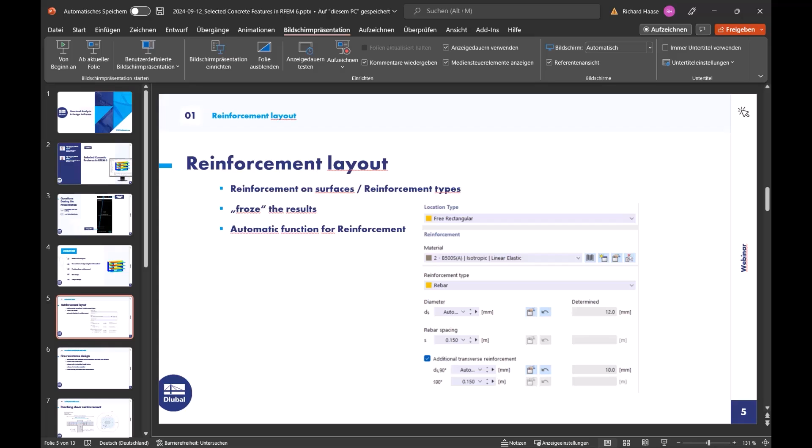Okay, then now let's really switch to RFEM 6. It's a two-story building, a simple building with some cantilevers. The materials are also normal, so normal concrete and concrete steel, nothing new and spectacular.

Important for this webinar is that you have activated the concrete design in the base data add-ons. All these features I will show you need this design add-on activated.

And for the fire resistance, it's an additional point, but I will show you there is a connection to the building model add-on, because in the building model add-on it is possible to define shear walls and deep beams in a simplified way. If you don't use the building model, you must create, for example, the shear walls and deep beams via result beams. The building model has a lot of other features, but I will show you this fact for the fire resistance.

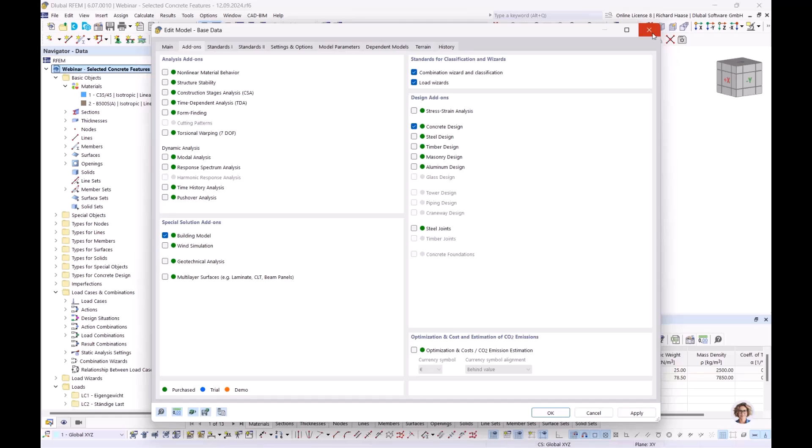But then let's come to the reinforcement layout.

I go to concrete design. We start at the beginning with the ULS, and don't calculate the SLS design situations. I want to reduce some calculation time, working only with surface 18, that's here on the top, and want to calculate.

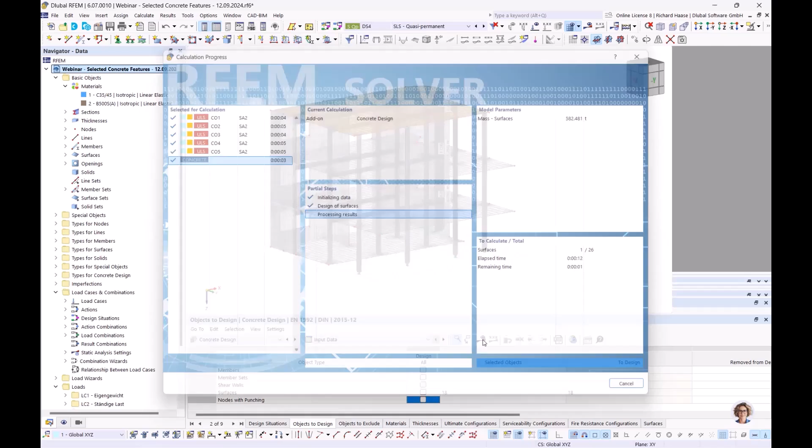So I have designed before some concrete stuff. For example, I modeled the concrete cover, and here's the surface reinforcement.

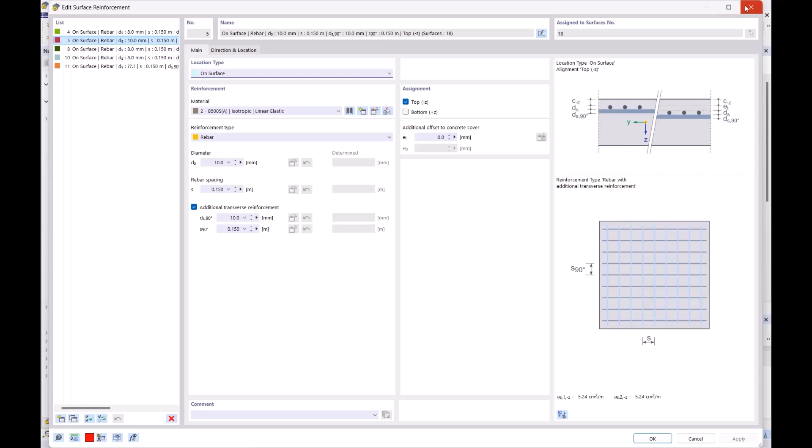So I'll show you for surface 18. I define a bottom reinforcement with diameter 8, rebar spacing 15 centimeters, and on the top 10 at 15, with all location types on surface. So we have here what I mentioned before, this free reinforcement type. So when you choose on surface, it is really on the whole surface.

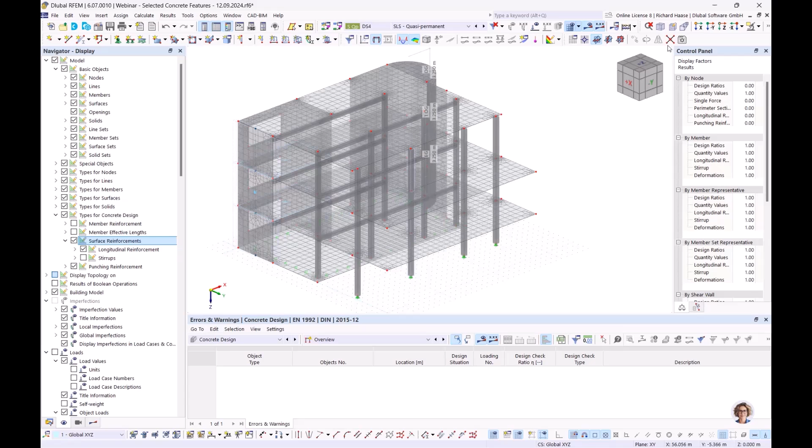Maybe I can show you here on the types for concrete design - the moment. Why don't I see it? Moment. I don't understand - on surface.

Okay, here. So for example, here when we choose surface 18, we want to calculate and select this. Then you see the reinforcement is over the whole surface, and on the bottom side here we have our 3.35, and the top side our 5.24.

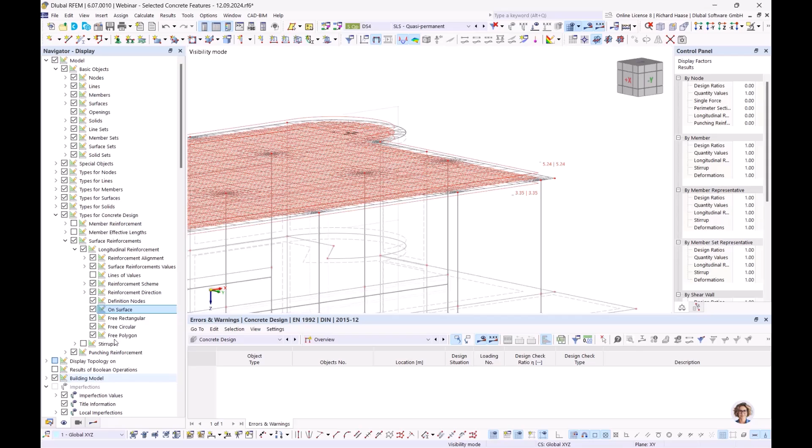So I will deactivate it again, only to show you how you can control it. And then we go to the results, and I want to look at the reinforcement first.

So we have here 3 chapters: required reinforcement, provided, and not covered reinforcement. Provided is what I showed you before. And what's interesting here is the required.

So you see, okay, how much reinforcement we need, also on the top side, and here the bottom side. So, and theoretically you can control it with the provided reinforcement and see, okay, on which points I need more reinforcement.

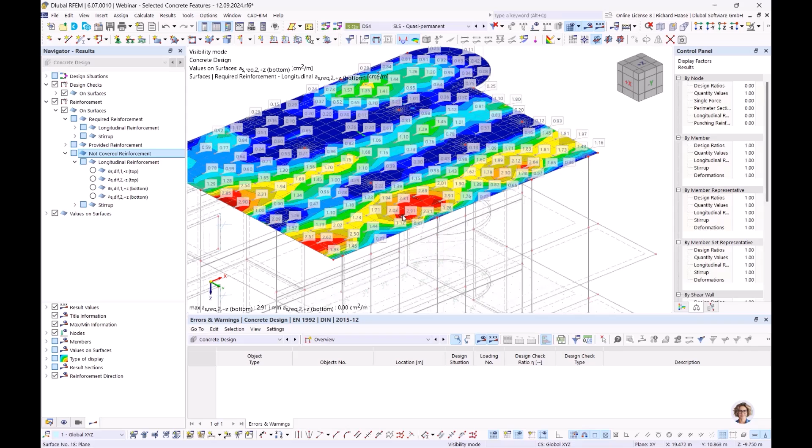So, and to do this automatically, in an easy way, we have here the not covered reinforcement. So you see directly on which points you need more reinforcement. For example, here it's only over the columns a little bit.

Now we have the option - now we know where we must increase our reinforcement. And because it is such a little area, it would not be effective to increase our on-surface reinforcement. So now we want to use our free reinforcement types.

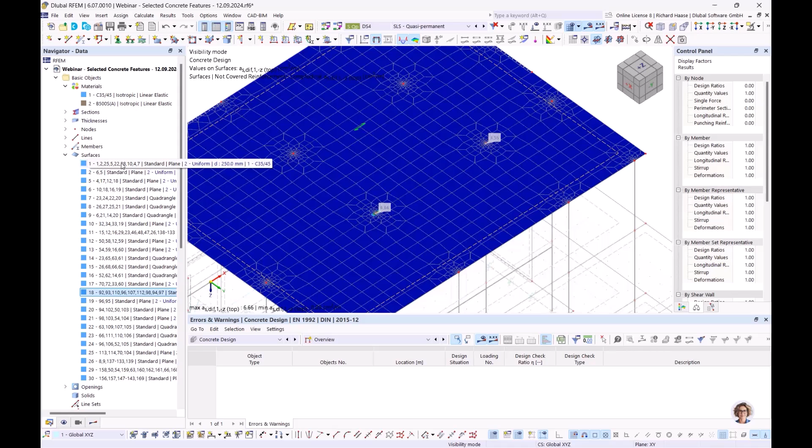So normally, I'll show you for concrete - when I use the surface reinforcements and say free rectangular, then we can choose our new automatic function. And now you can say the parameters, for example from 10 to 20 millimeter diameter, and then it interpolates between these sizes.

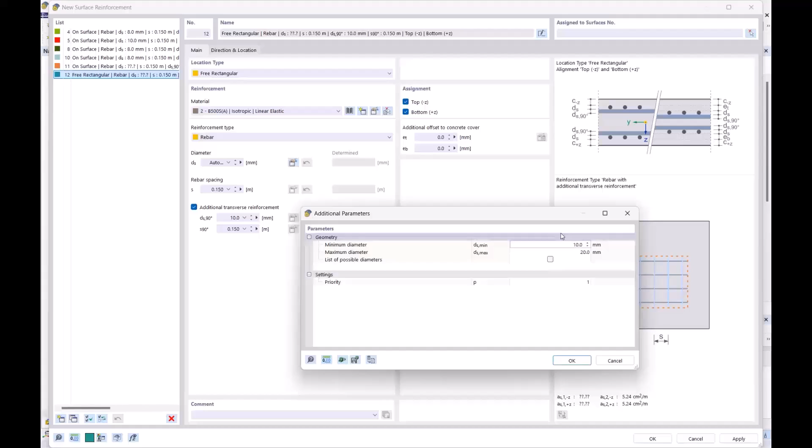What the program or the surface needs for reinforcement. So we say automatic, the same for the additional transverse reinforcement direction. Okay, and now we need the direction and location, say only on top side, and say 1 meter by 1 meter, and set this point here over this column.

Okay, and when I say okay - oh sorry, I don't assign a surface, so we need this 18. And when I click OK now, this question comes up because we define a new reinforcement, so the program deletes all concrete design results. That's the default setting.

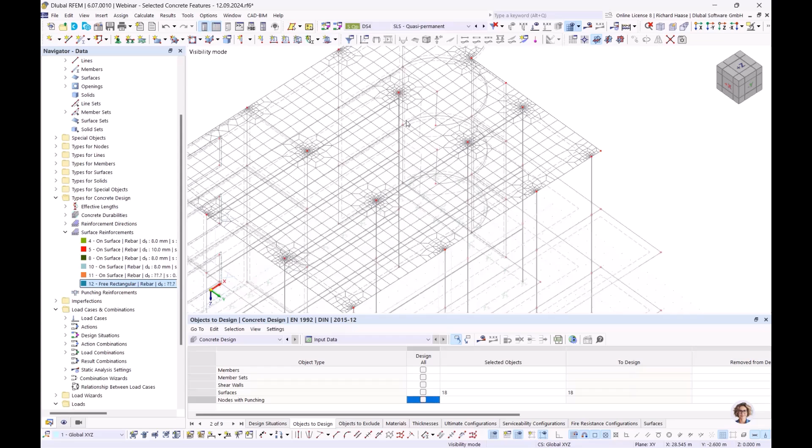Now we can remember that over this column we need additional reinforcement, but imagine you have a bigger model with reinforcement needed at different points - then you can't remember so many areas. So we've implemented a new feature. Let me delete the free rectangular again and show you, in the input data under this button, the global settings for the concrete design.

And now you see a life cycle of results, and this is exactly the point I mentioned. If we deactivate this, then the results are not deleted, and it's a big point for modeling the reinforcement. I will show you.

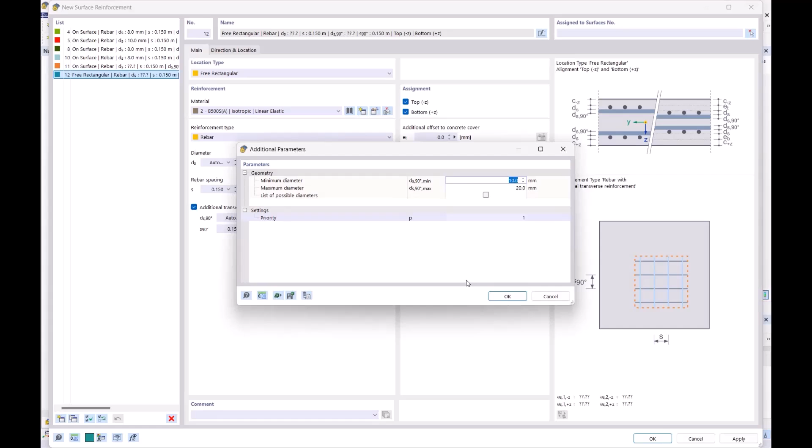So okay, let's do it again. So we say free rectangular, our automatic function, okay, direction 1 meter by 1 meter, and say now okay over this column. So and now we have defined...

Now we have defined our free rectangular reinforcement, and you see the results of the reinforcement are still live. So that's an important point.

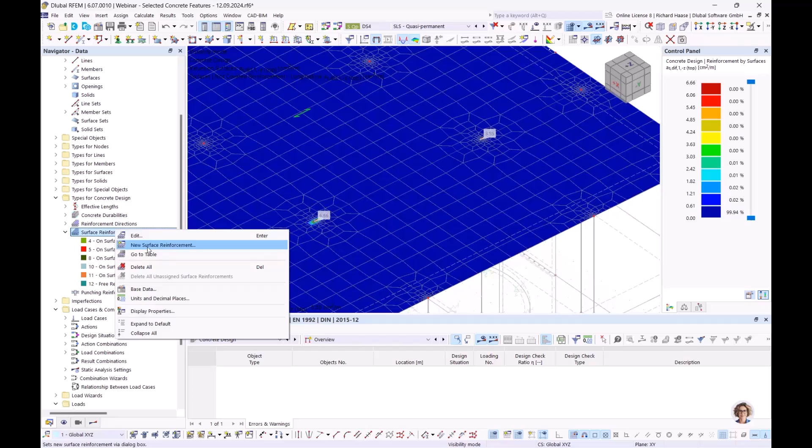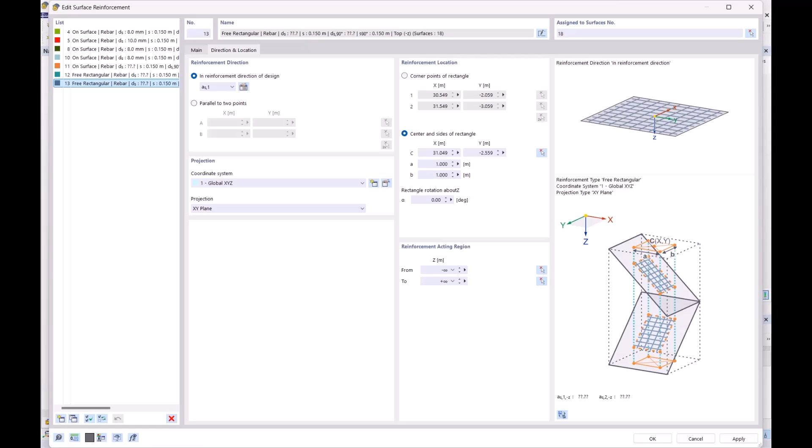So let's do the same automatic, copy it, only the top side, and say here the 1 meter is perfect for us. And let's go to the other column. Okay, and now we have both free rectangular surface reinforcements with the automatic function.

And so then we need to go to the input data and activate the life cycle again. So then you see, okay, now we have all points cleared with our additional reinforcement, and we can start the calculation.

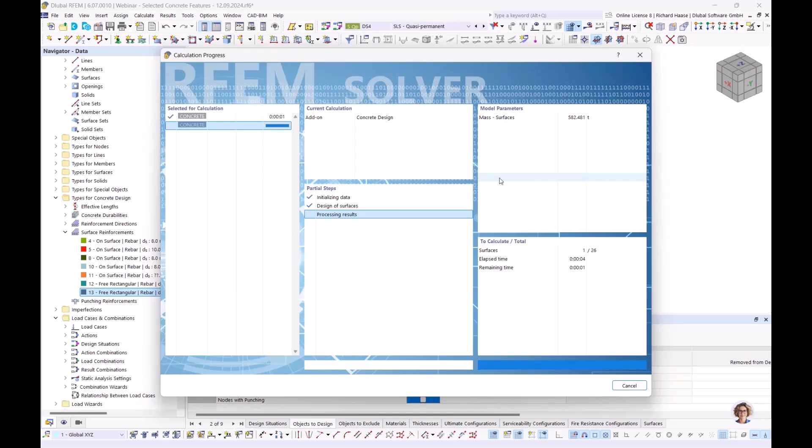Okay. Here is something wrong. Wait, I think I don't get the point. 18. Automatic. Sorry, now we see this, but why don't I see it here in this way?

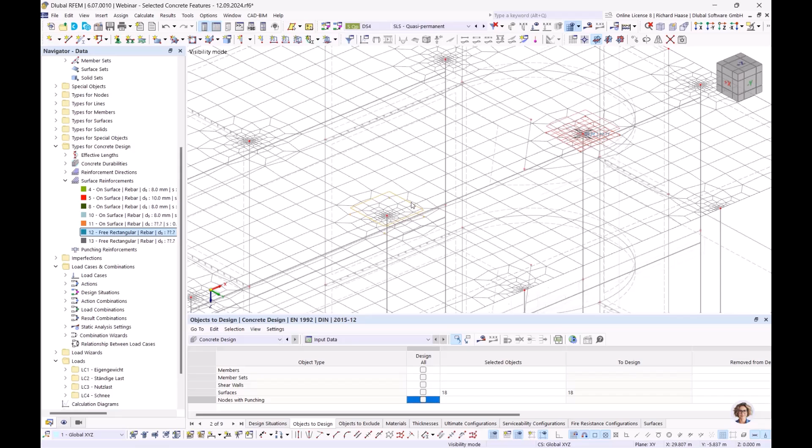Let's do this also. And see here, and okay. Okay, then let's try again with the calculation.

Okay, so now we see here that the automatic function calculates the needed 10 millimeter diameter, and we can leave it on this automatic function. But when changing the system, for example, the automatic function will calculate and calculate again.

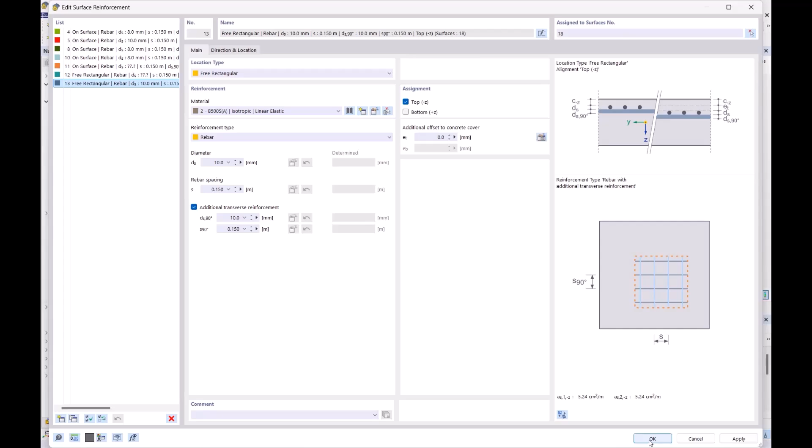So when we say, okay, it's enough for us, then we can copy the determined value here, and everything is fine. Then we have found our final reinforcement object.

So that's for me the first point: to check the reinforcement, the not covered reinforcement, and then you can check also the design checks, different checks for shear resistance and different things. And when all of these checks are green, then you're finished.

So I would say the customer wish was, because normally we have much more of these design checks, but there are construction rules. They are also in the Eurocode, but a lot of customers wish to see only the required statical sides of the reinforcement, for example.

And so you can also deactivate it or activate it in the global settings, here the detailing and particular rules for reinforcement, and you see here a lot of points. So it's your choice, your thing, if you need it or if you don't need it.

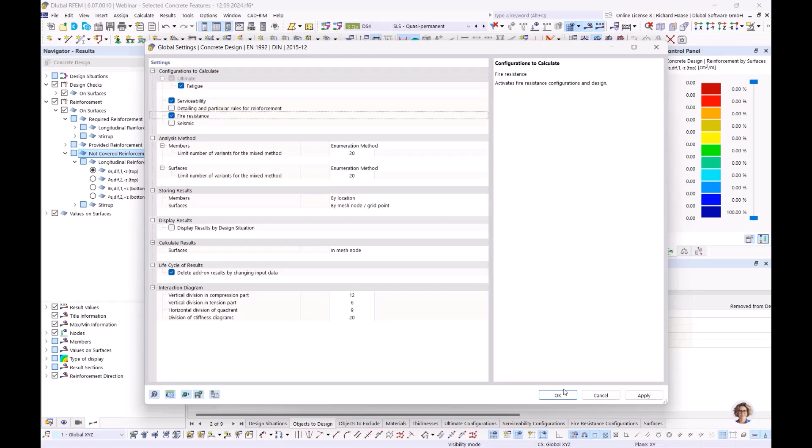You can activate the fire resistance here. The default setting is that fire resistance is not activated. So click here to do the options and the calculation parameters for the fire resistance.

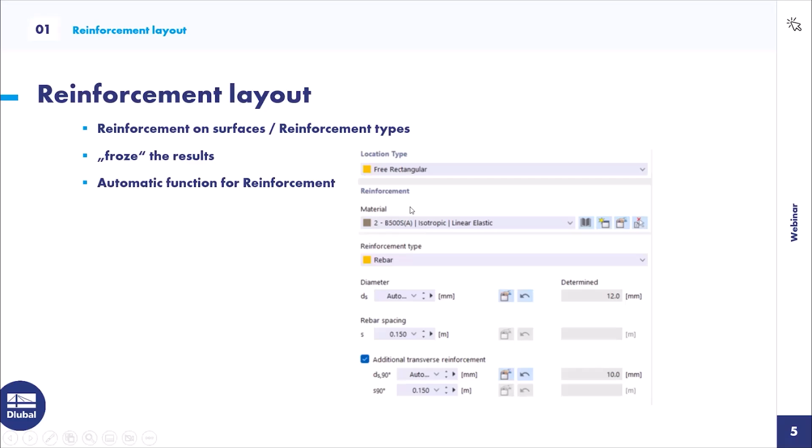Then what I'll show you about the building model, the surface with result beams, and with the shear wall, I will show you.

And also for the columns, we have an additional point for the definition of fire buckling length factors. So you can calculate with normal temperature with a different buckling length factor than for the fire hot calculation. Important point.

Also for columns, we have, next to the table method, a fire duration equation, and I will show you this, and also for beams.

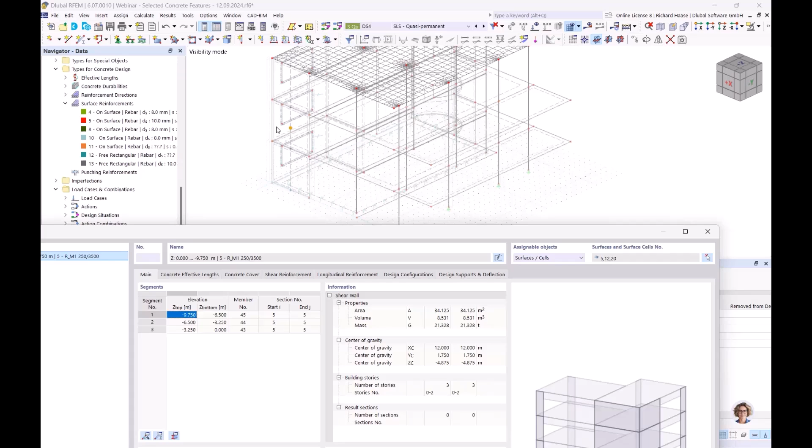So you can here define shear walls and select surfaces, and out of the surfaces the program automatically creates a result beam to integrate all the forces of the model at this point.

Then you can define here concrete cover, shear reinforcement, longitudinal reinforcement, and so on. I have done it before; I only want to show you the results for the fire resistance here.

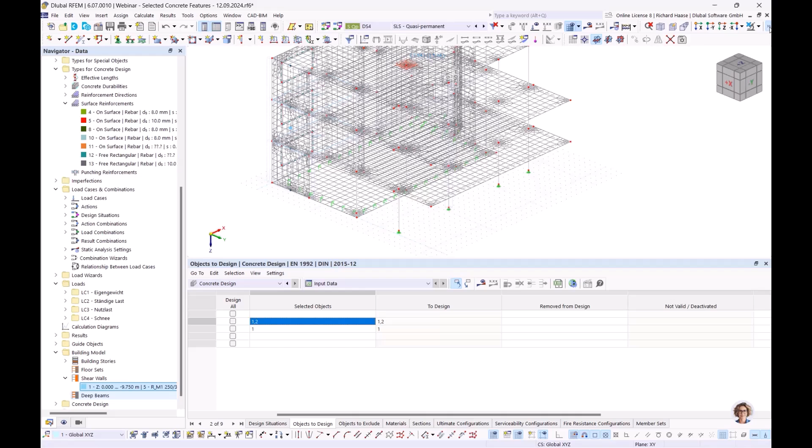So let's select our shear wall. Okay, and also the member sets for our column, and also... I don't find this. Oh, so transparent. For this beam here. Yeah, okay.

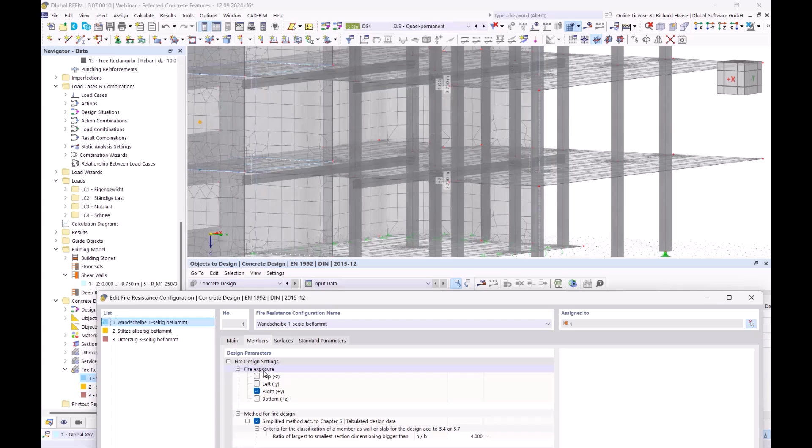So then let's switch, before we start the calculation, to the fire resistance configurations. I forgot to name it in English, translated as the shear wall, and it's one side fire exposure. So because we have different types of fire here, we need different fire resistance configurations.

For example, for our shear wall, we have only fire from the inside of the building. For our column, we have 4 sides, so the fire comes from all sides. And for our beams, only from 3 sides, from left, right, and from bottom, because on the top side we have the surface. So you need to define different configurations.

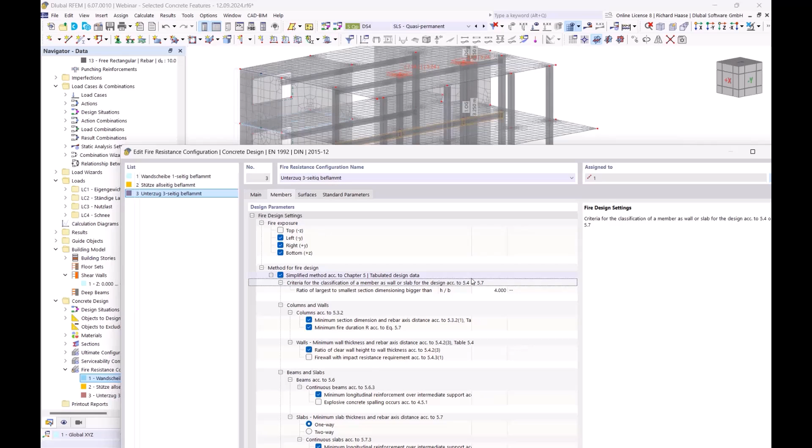Because of these generated result beams here for this shear wall, we have also implemented a criterion of classification: is it a member, a wall, a slab, or a column? The program looks at the height and the width, and if it is over this definition, the program knows, okay, it's a wall, or it's only a beam.

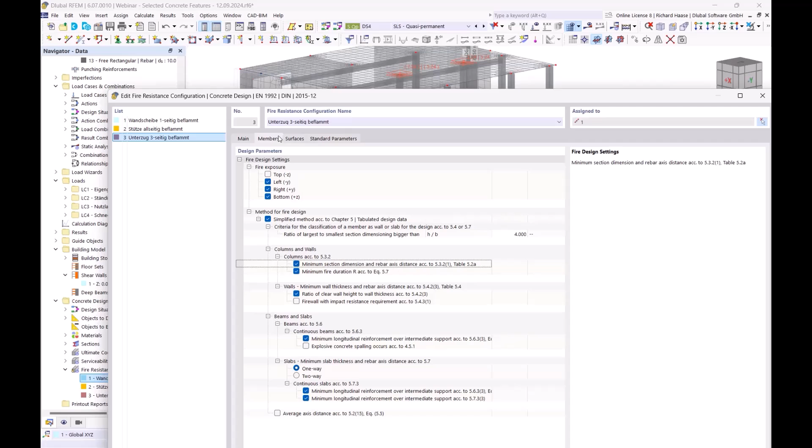So okay, for the columns, as I said before, we have two options. Here is the table method and the fire duration, and also other things for slabs and beams. Analogous to these member settings are the surface options, but I don't need to show you. You can do it on your own. Okay, then let's start the calculation.

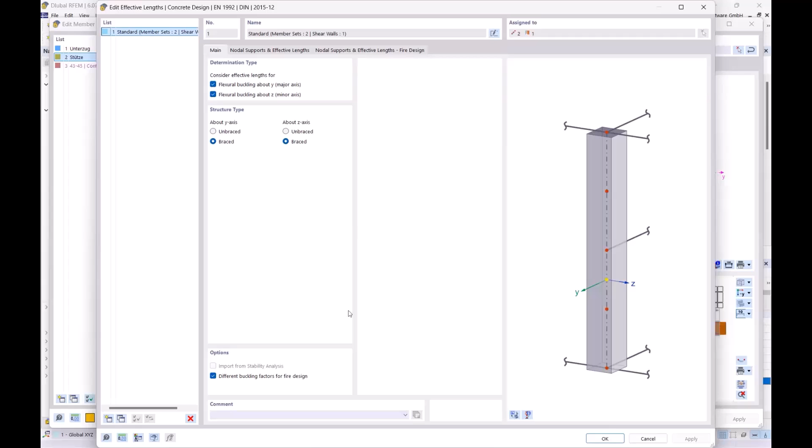Then, what I told you about the columns. Here we have the options for the concrete effective length, and you also see it here. On one side we have 1.0, and on the other hand from 0.5 to 0.7. These are the different buckling factors for fire design. Here is for normal temperature, and here we can reduce the effective length according to the Eurocode, so it's an important thing to implement and use these factors.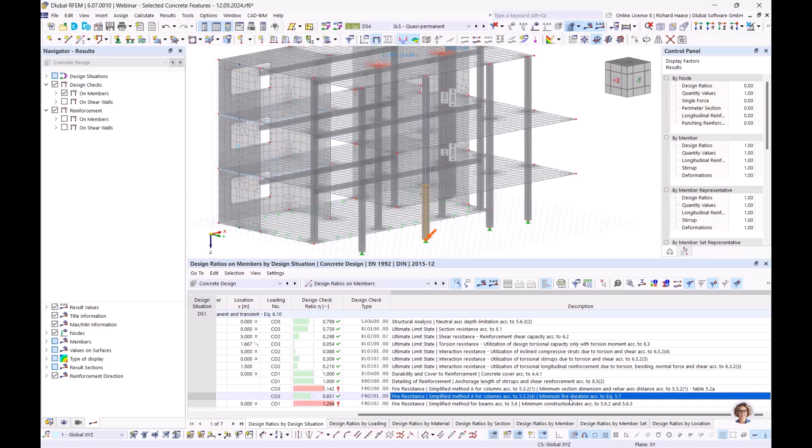Okay. Good. Then design ratios. For the columns, you see here two design checks: on one side the table method, and on the other side the fire duration equation. And you see the differences. Both design checks are okay for the statics, so you can decide. Sometimes one is more effective, so you have the option to choose one, and you can deactivate the unneeded design check in the configurations.

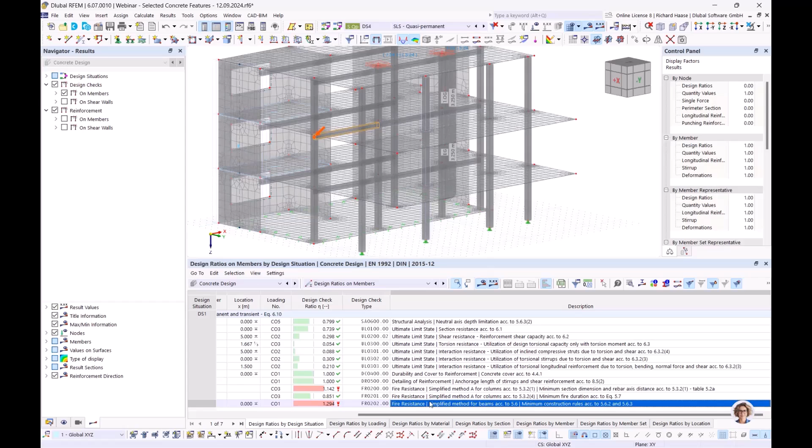Okay, then let's look at our beams. You see it's over 100%. Maybe when we check with literature, we say, okay, why are we over 100%? The point is that here table 5.5 is used, and table 5.5 is for statically determinate beams. So why did it choose the, let's say, wrong table?

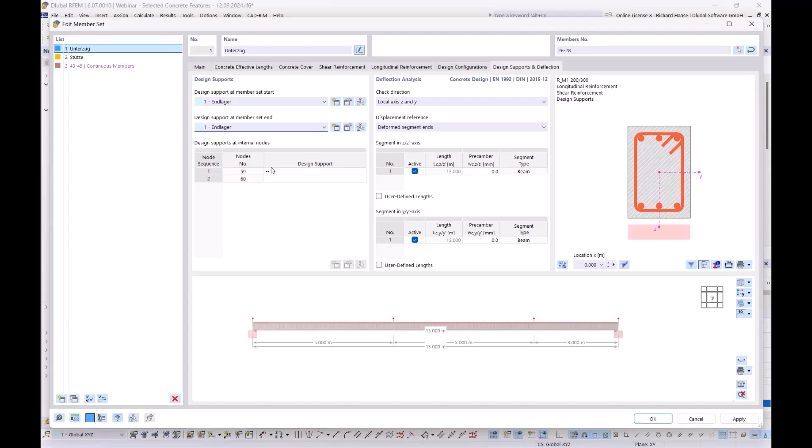That's because you need to set some points at the design supports and deflections. At the moment, the program sees it as a 13 meter long single-span beam. So we need the final support, and for these internal nodes we can choose the other type, and I'll show you the difference. At the start and end points I set this type, so there's no inner support, and on the internal nodes I use this inner support. So it knows, okay, it's one long beam.

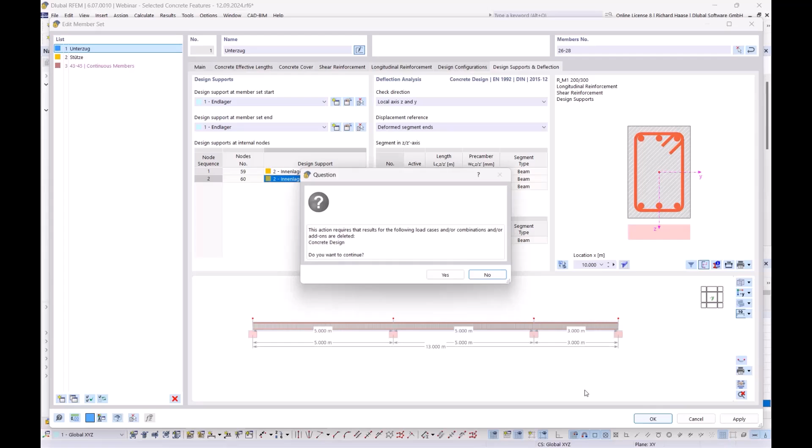Then you will see in a few seconds the difference. We were at 130%. So let's check now, and go back to design ratios for members. Now you see the beams are at 94%. Before it was table 5.5, and now we see it's a statically indeterminate beam, so it can choose table 5.6, and you have different values. So it's important to define these supports.

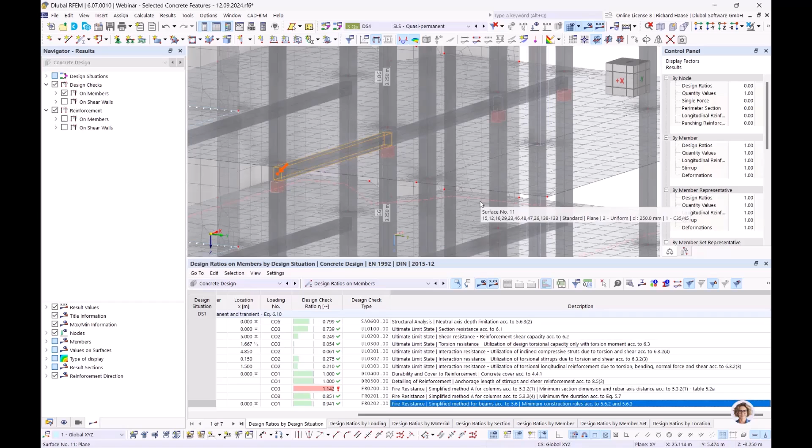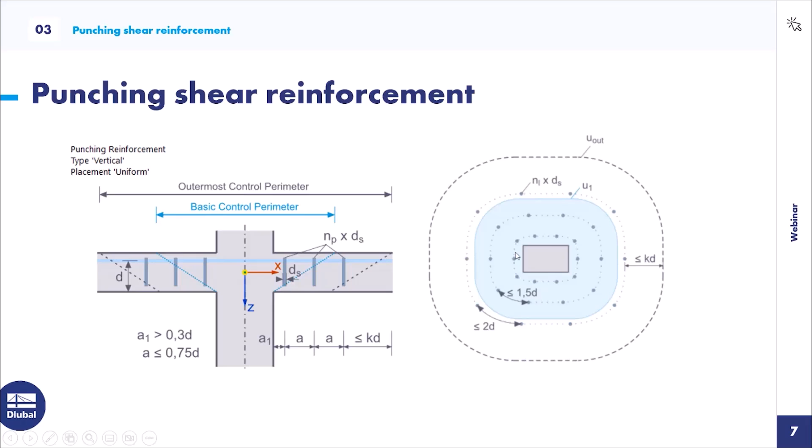Good. Then let's go to the next point. I will delete these points for better overview, and we will switch back to the PowerPoint. Now we are on the theme punching shear reinforcement. Those are the pictures, but maybe I'll show you directly in the program, that's easier to understand. I want this point, node 28 with punching. Let's start with a calculation.

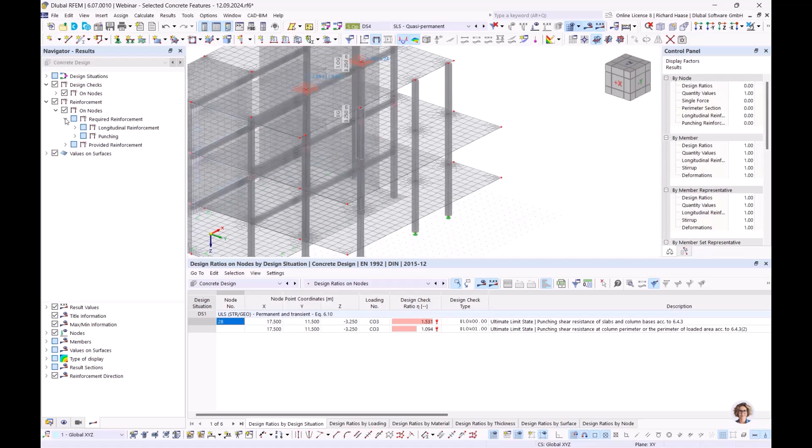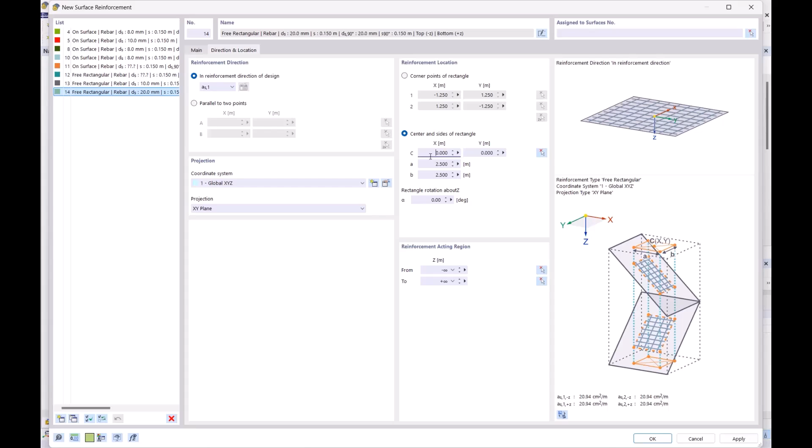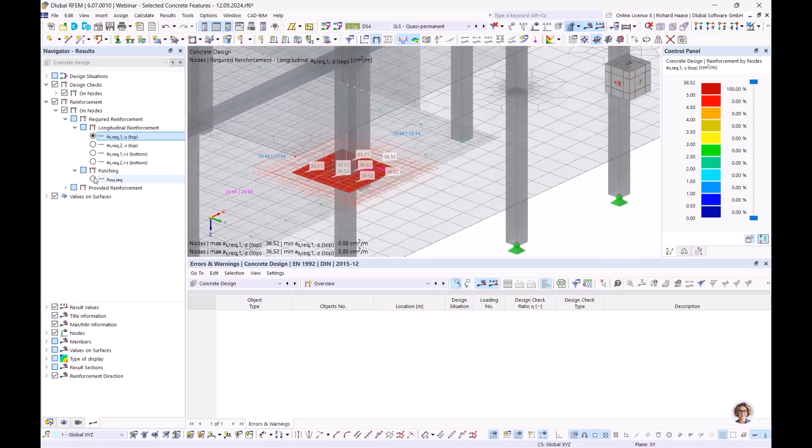I forgot the surfaces here. Okay, let's calculate. Then you see it needs more and more. At this point, you don't get this problem away only with additional longitudinal reinforcement. So let's see what it has done with the punching. It says we don't need it. Sorry, that shouldn't be. Maybe I made a mistake and chose another concrete. Let's check it. Let's switch back to 37.

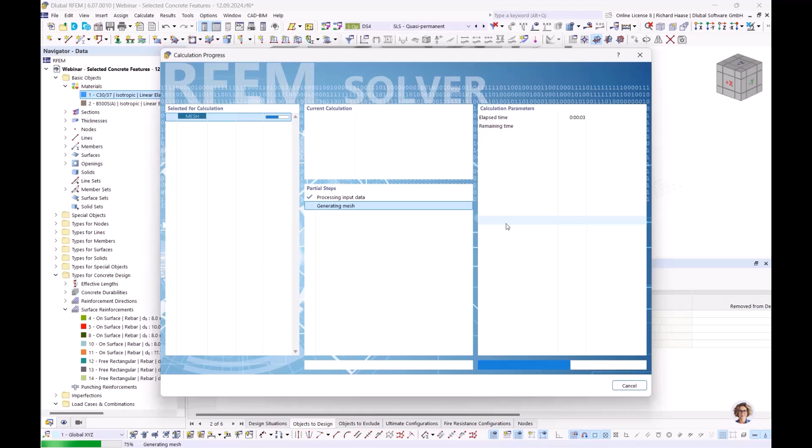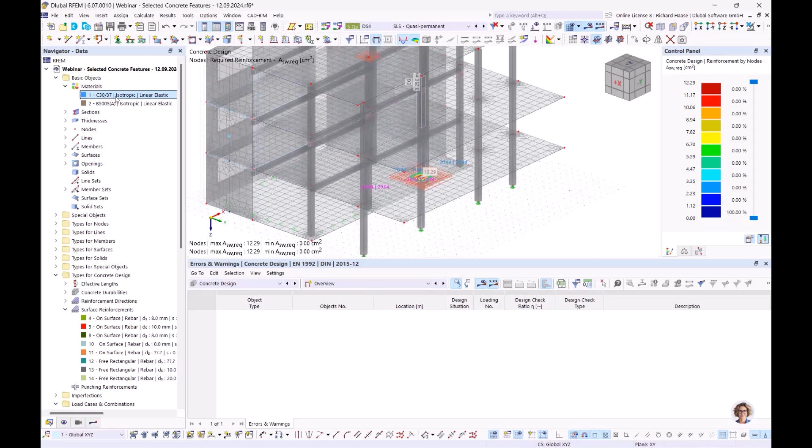Yeah, okay, sorry, I forgot to switch back to the other material. Okay. So now we have required punching reinforcement, and you see that it has 3 areas with different values.

So let's create some punching reinforcement. I will set a new one, and here you have the options between uniform and different. With uniform, on each perimeter you have the same number of legs, and for different you can define a different number of legs on each perimeter.

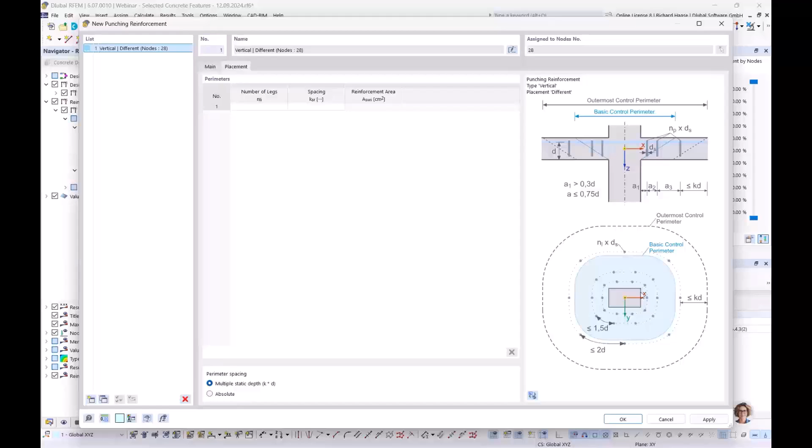But I would stay with uniform for this example, and let's say 4 perimeters and 16 legs in each perimeter. Okay, and now you see also the reinforcement, and let's calculate again. And now, wonderful, we are everywhere below 100%.

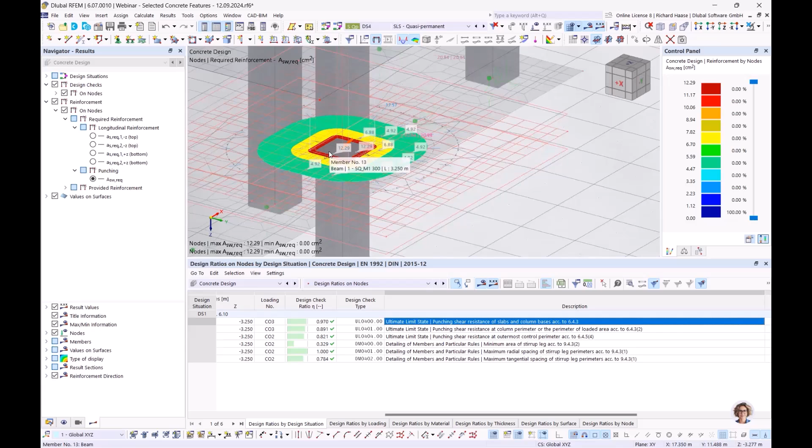And the thing is, you would expect that the inner circles are okay with the 16, but on the outside perimeter you don't reduce the number of legs, and this could be because there are also detailing checks. So the leg distances on one perimeter can be a reason that you need more legs.

So it's not only the numbers, it's also the detailing and particular rules which can make you need more legs on a perimeter. But okay, I only want to show you how you can design such punching reinforcement. That should be enough for that, and let's switch to the next chapter, the SLS design.

We will look at the deflection analysis and limitation of steel stress, and you will see we are independent from the ULS design, so we can analyze it and get required reinforcement only for SLS results. That's a good point. And then I will show you the creep, shrinkage, and tension stiffening effects. If you don't know tension stiffening, I copied a description from our homepage, so you can read this.

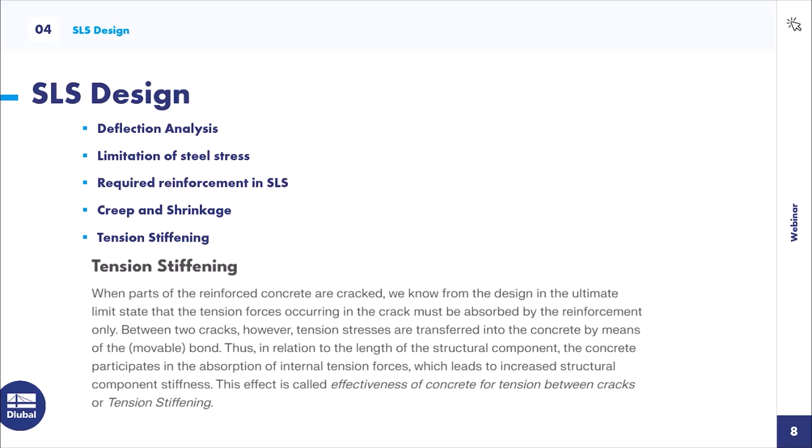But in the end, with tension stiffening, normally you calculate with an uncracked section or with the completely cracked section, and tension stiffening gives you the possibility to use the areas which are not cracked, so that you can use this stiffness. Maybe I'll show you in the model, it's clearer then. Okay, let's switch back to RFEM.

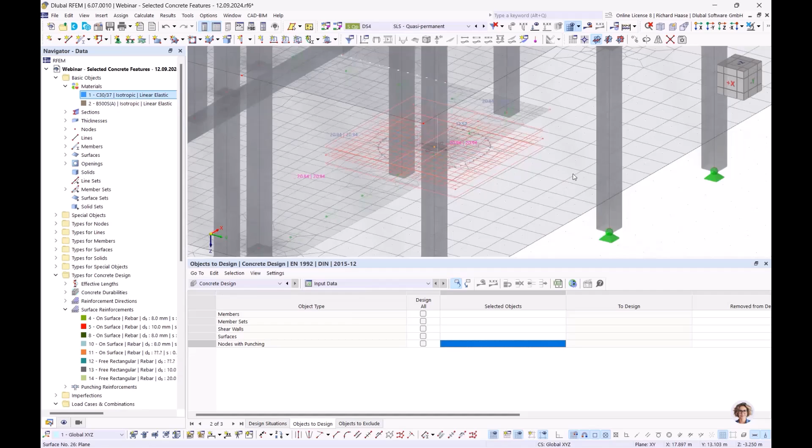Let's delete this, and I want to show you the SLS design checks for surface 30. For the deflection, it's the first point you must check when you go to the surface, under the point deflection. First the surface type: you have the option of double supported, the normal surfaces, and also cantilever. So you must do it in a manual way. So we have here a cantilever and normal.

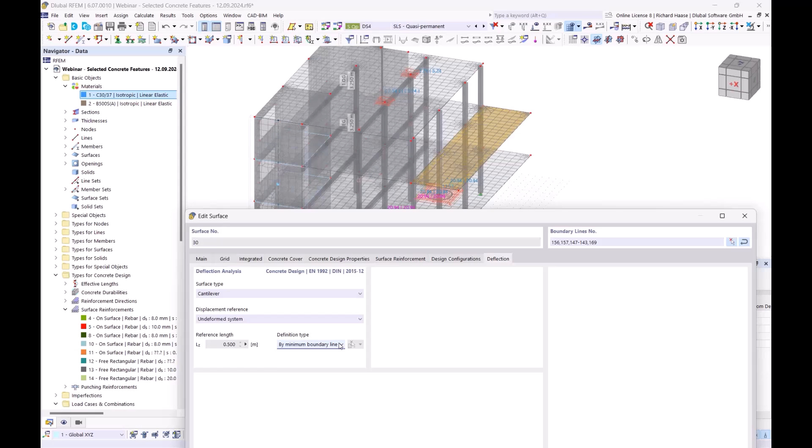For simple surfaces that functions very well, for example the maximum and minimum boundary lines. But when you choose the maximum, you have this 14 meters, which is nonsense, and when you choose the minimum, it's 50 centimeters, I think because of this little area. But you have the option to do it manually, and we need from this column to the end of the surface, 3.50 meters. So you must check it for the deflection. That's very important.

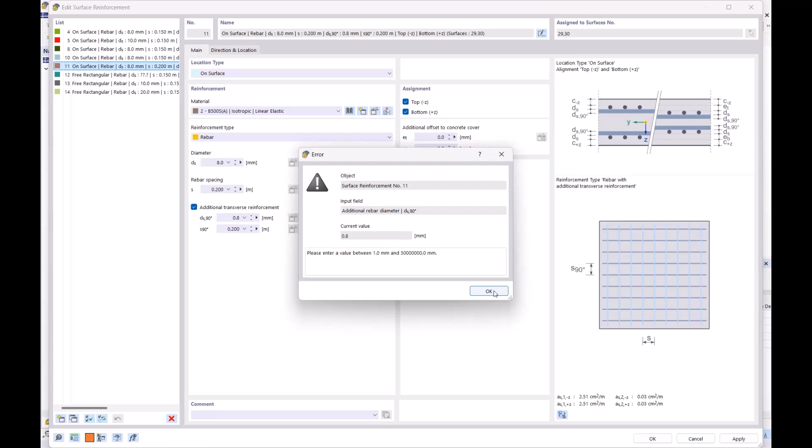Okay, then when we have chosen this, wait, I will check again. Here, let's take a small reinforcement so that we see the effect better. Okay, and let's look at our serviceability configurations.

We have here the limitation of steel stress, and the normal case is that it uses characteristic design situations, and relatively new in RFEM 6 is that you can also use other design situations, for example quasi-permanent or frequent. These individual options you also have for the crack analysis, and also for the deflection analysis, where quasi-permanent is the default setting, so you can also do it for frequent and characteristic. It's a nice option to have.

Okay, then let's deactivate this. Let's look at the limitation of steel stress first, and start the calculation.

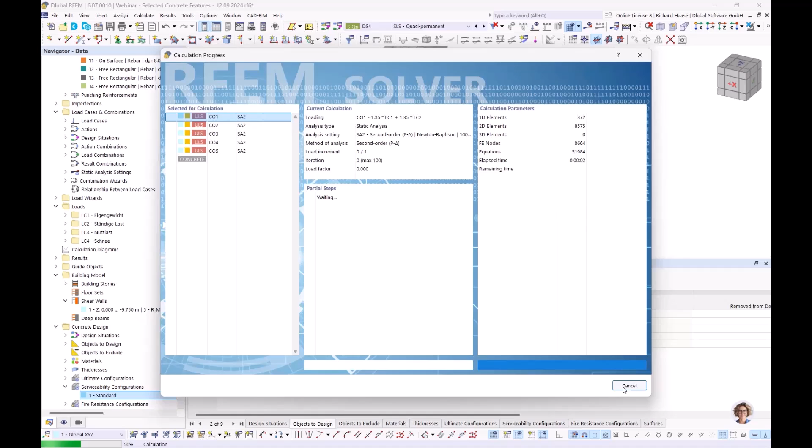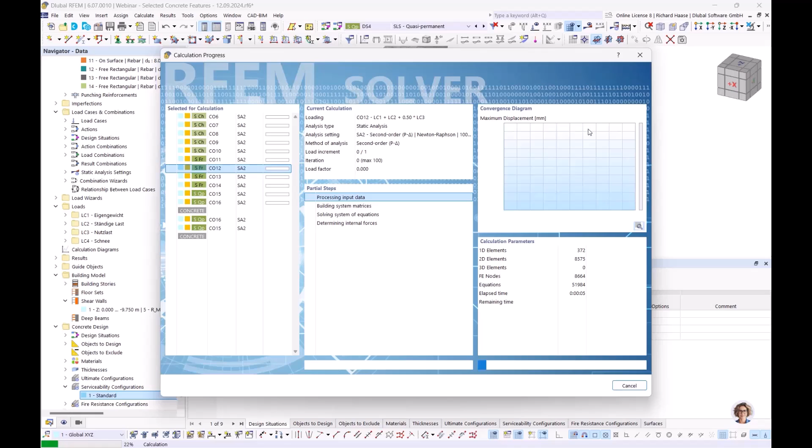Okay, maybe mesh and calculate it new. Okay, now I see, sorry. Yeah, of course, we must switch back now and don't want the ULS, and switch only to the SLS design situation types. Okay, sorry. So you see that it's independent from the ULS, and you can analyze the influence of only SLS calculations better.

Okay, fine. So design range is okay. You see here the stress limitation is quite over 100%, and you have here only the provided reinforcement, and so we have an option. Normally it's activated, but I want to show the difference. It's a determination of longitudinal reinforcement, and this strong feature, when I activate it, you see which points will be taken for this calculation.

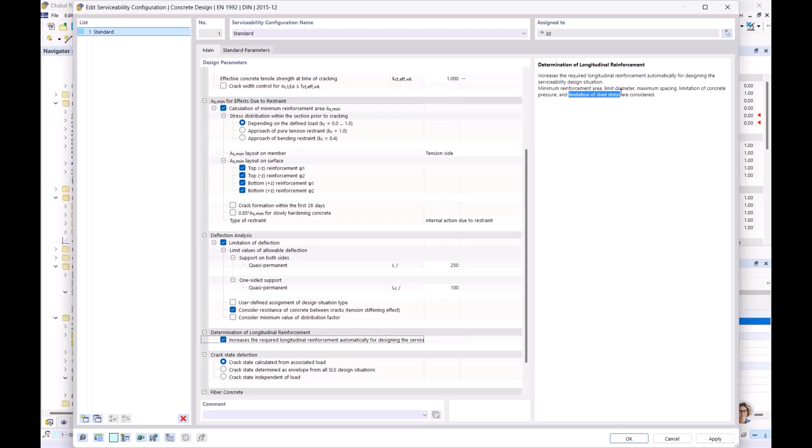So for example here, limitation of steel stress, and you know, before we had only the provided reinforcement, and this button, when we activate it, okay, we must calculate new, and 130% maybe, remember, for the steel stress. And now when I calculate it, okay, then you see 99%.

And why? Because now we have not only the provided reinforcement, we have also the required and the not covered reinforcement, and this point shows when you set in the required reinforcement, or better the not covered, then the steel stress can be done. So you only need to model this needed reinforcement. Yeah, that's a big point here.

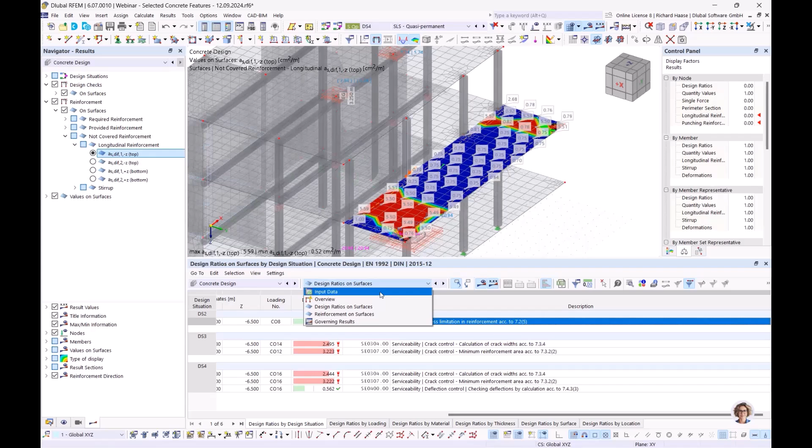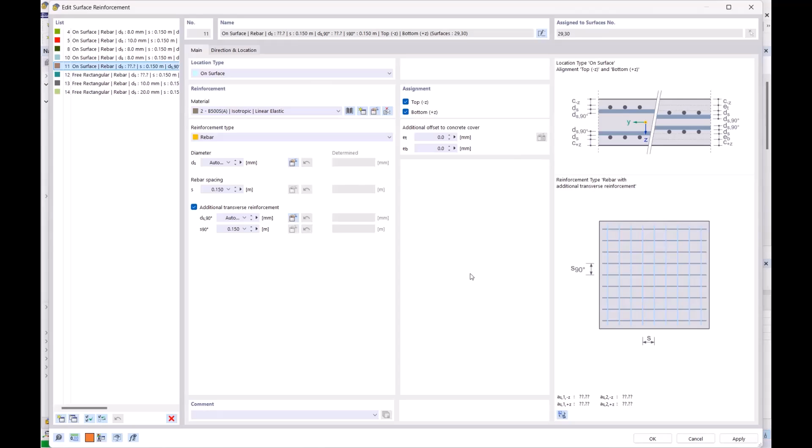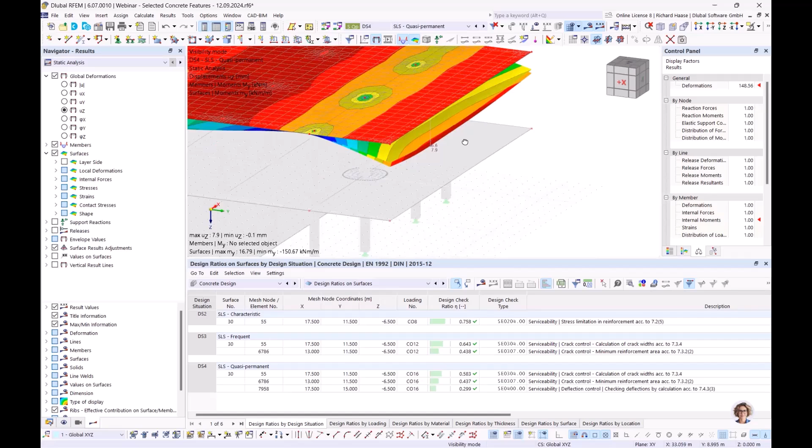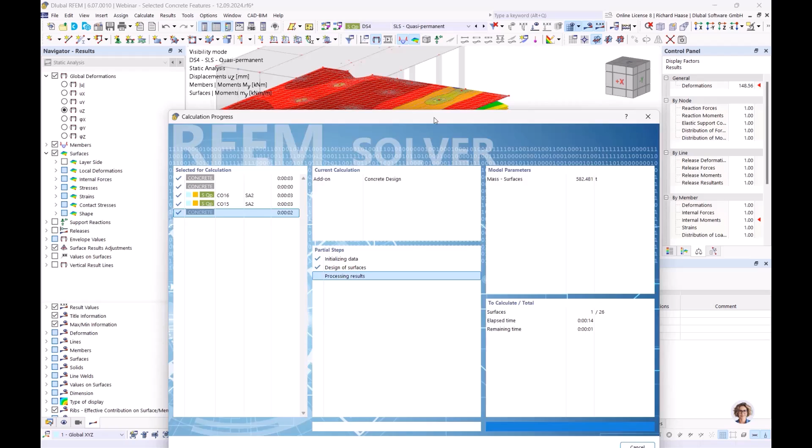Yeah, good. Then let's come to the deflection. So we have here our quasi-permanent calculation, and we want, wait, let's maybe have it. So now we have, okay, a deflection of 8 millimeters, and now I want to show you this tension stiffening, deactivate, okay, sorry. No, wait. Come on. Yeah, that should not. Yeah, the 8, nothing changed, sorry. But I want to show you the tension stiffening later.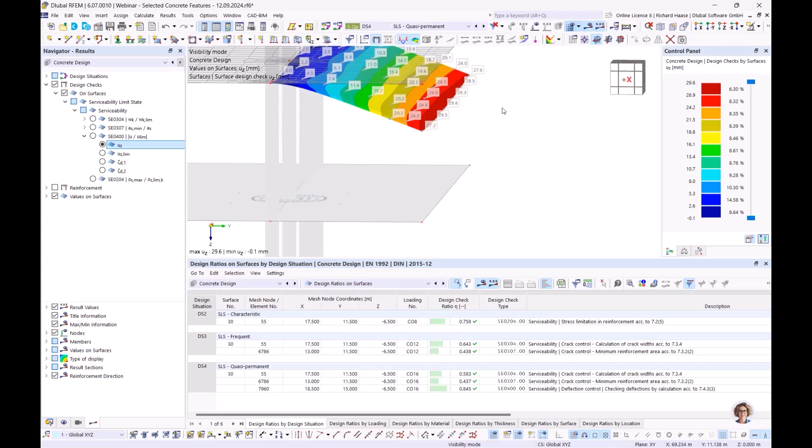Okay, then we must go to the surface checks, and we see here the u, the limit is 35 millimeters, and now we have nearly 30, and so it fits the normal factors between the normal calculation and the calculation with creep and shrinkage, so it's a good value. And now we have the zeta, and the zeta is the status, I say, of cracking of the objects. And you see here it's everywhere 1.0, so it's a completely cracked section.

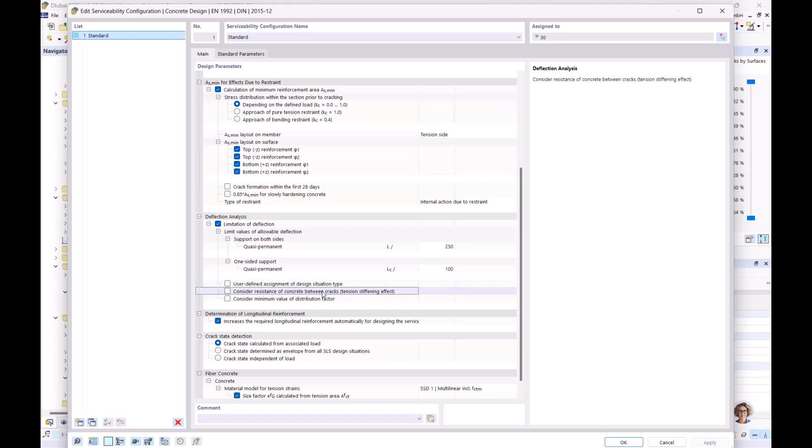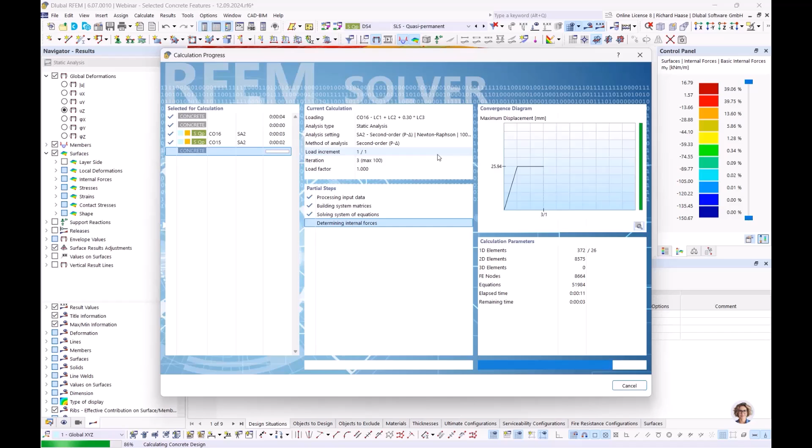And now what I try to explain is tension stiffening. So you can consider the resistance of concrete between the cracks. And now let's activate this. Okay, and start. So 29.6 without. And you see here it's 26. So the tension stiffening shows its positive effects.

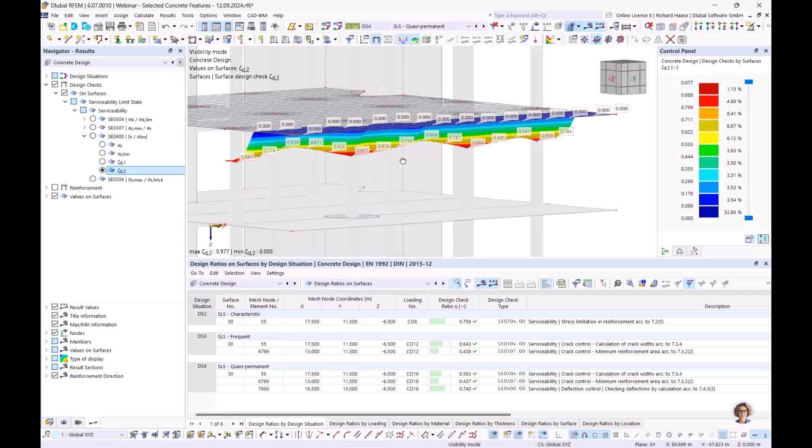And let's again look at this zeta value, and you see here, near the columns where there is high danger for these cracks, it's nearly 1.0, but in the other areas it's between the uncracked and the completely cracked sections. And this has an influence on the deformation. So that's tension stiffening and the creep and shrinkage effects.

Okay, that should be it for the SLS design checks. Then let's switch back to the PowerPoint and go to our last chapter. It's the fatigue design.

And I created another, more simplified model for you, only for understanding. So we have two alternative fatigue designs in RFEM 6. Level 1 is a simplified design check, and in the Eurocode there is an allowed stress range, and for this design check you aren't allowed to go over this allowed stress range.

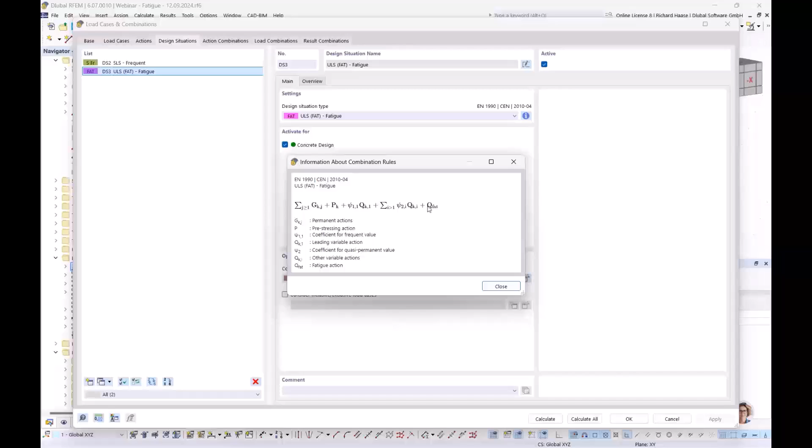And for level 2, you need its own combination. It's nearly the same as SLS, but here you have an additional parameter. It's this Q fat, and this Q fat is without reduction coefficients. And for this fat value we have implemented, you can select it for imposed loads. That's traffic. There you can choose this. You say, okay, that's a fatigue load, and out of these definitions, RFEM creates a new action, and then you can say, okay, alternative, and have these loads here.

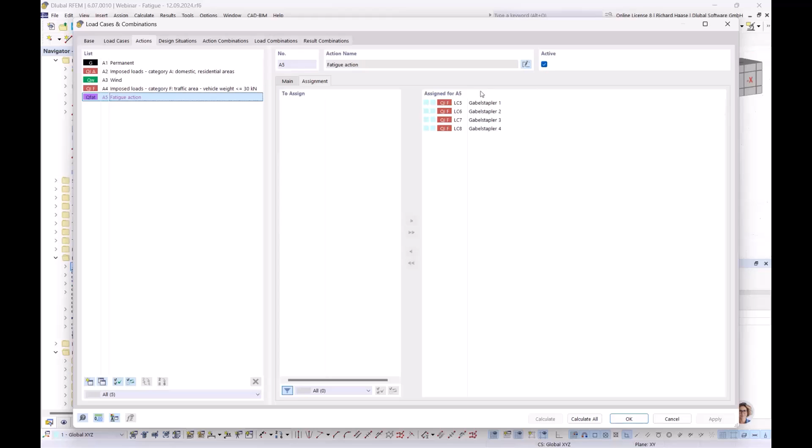Okay, then let's first see the loads. Okay, that's permanent, and here the loads, here the wind, and here is the big load, the fatigue load, I say.

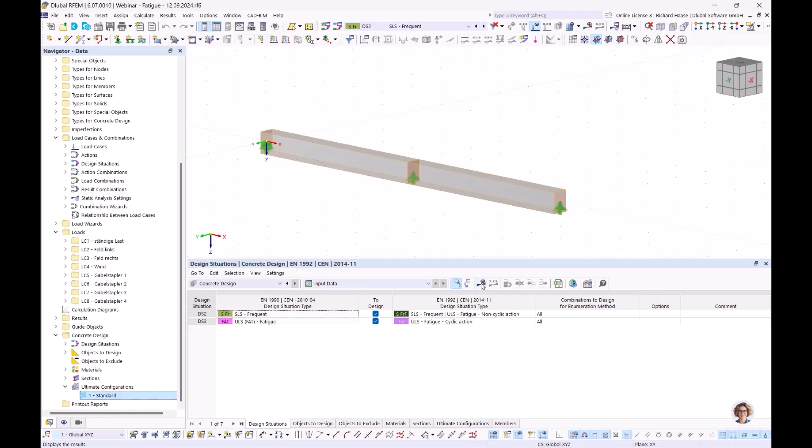And so you can switch between level 1 and level 2 in the ultimate configurations under fatigue, level 1, level 2. And when you choose level 1, then you must also choose the design situation type here, the non-cyclic and the cyclic. So level 1, level 2. Then let's start the calculation for the level 1 results.

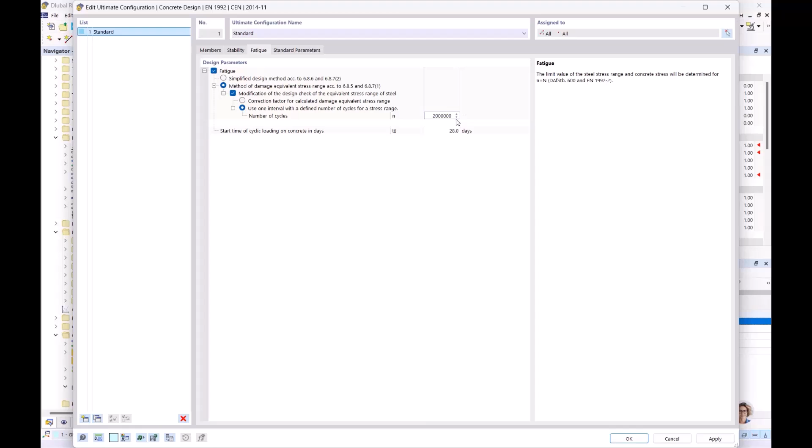Okay, then let's go to level 2. As I said, here the number of cycles, so 500,000, or we can also say, okay, 2 million cycles. Okay, and then the level 2 design check.